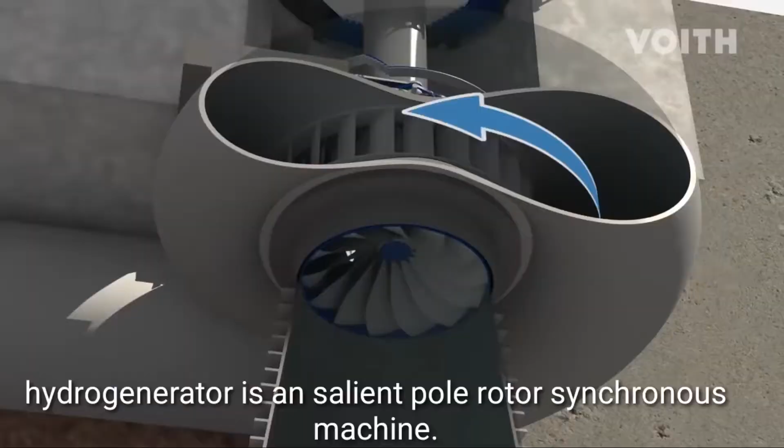The hydrogenerator is a salient pole rotor synchronous machine. The turbine rotates the rotor by the action of hydro energy from water flow. The turbine shaft is the same as the rotor shaft.

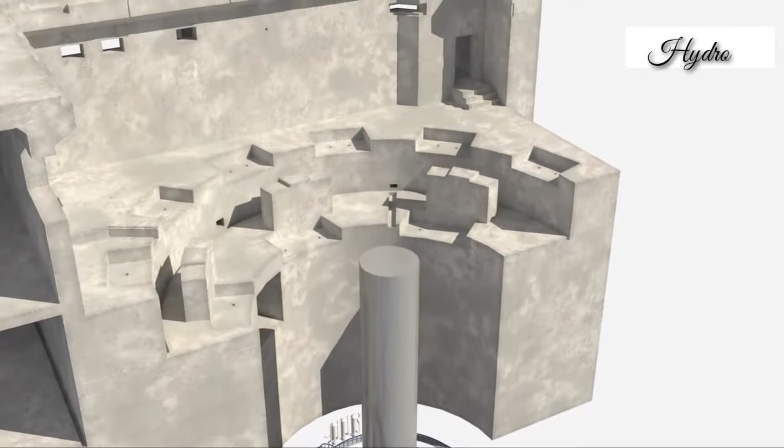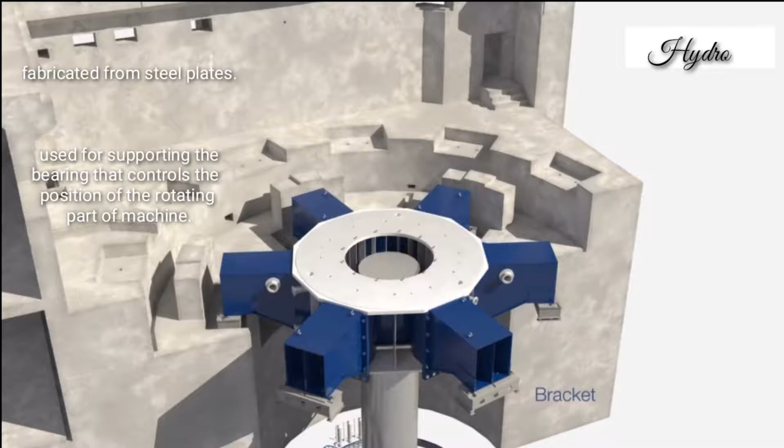This is the bearing bracket, fabricated from steel plates. It is used for supporting the bearing that controls the position of the rotating part of the machine, and it provides a foundation for brakes and lifting jacks.

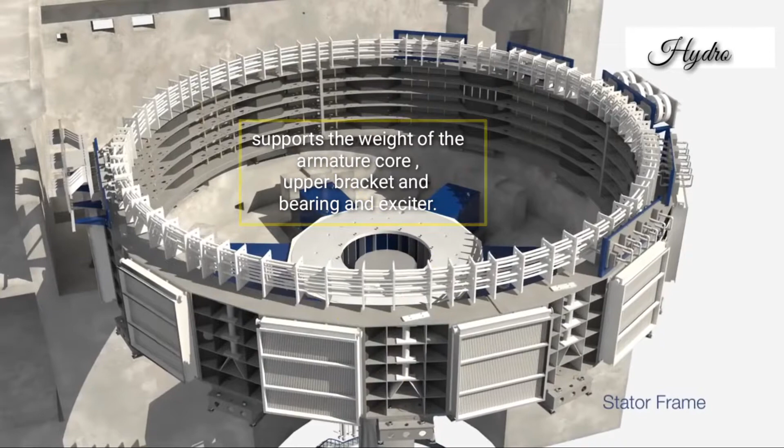The stator core is made up of cold-rolled grain-oriented silicon steel and carries the armature windings.

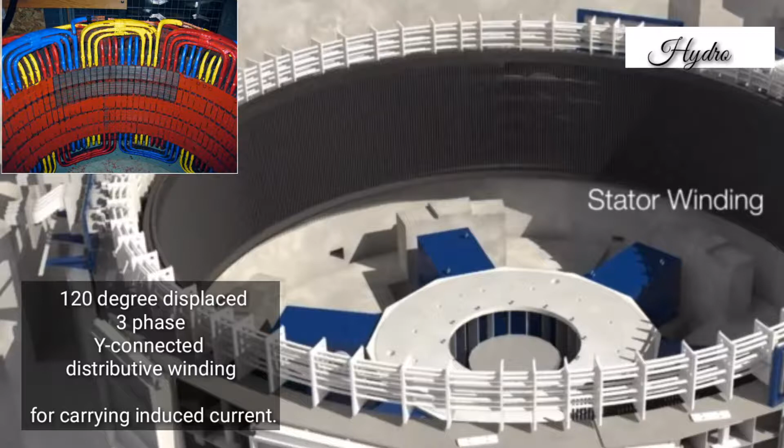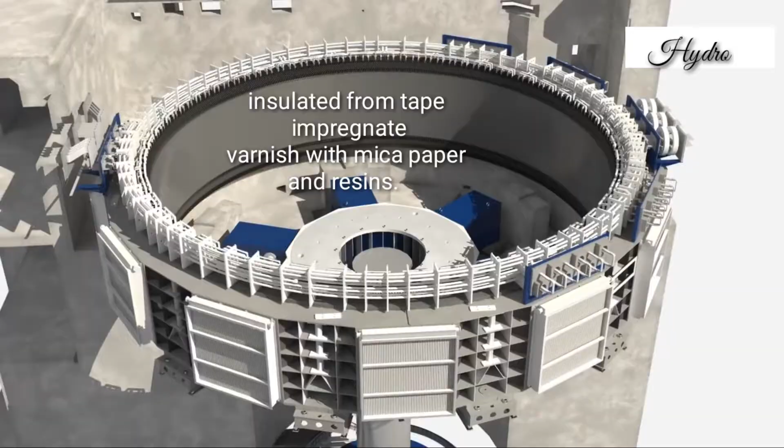The stator winding is a 120-degree displaced three-phase star-connected distributive winding for carrying induced current. It is insulated with tape impregnated varnish, mica paper, and resins.

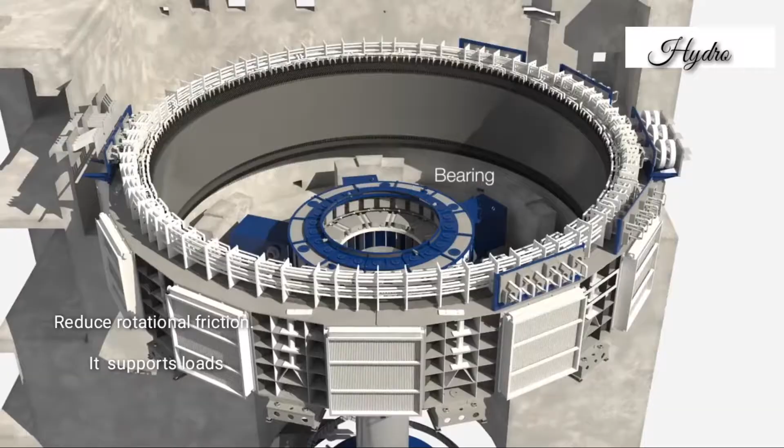The bearing is a thrust and guide bearing located below the rotor. It enables rotational movement of the shaft, reduces rotational friction, and supports loads.

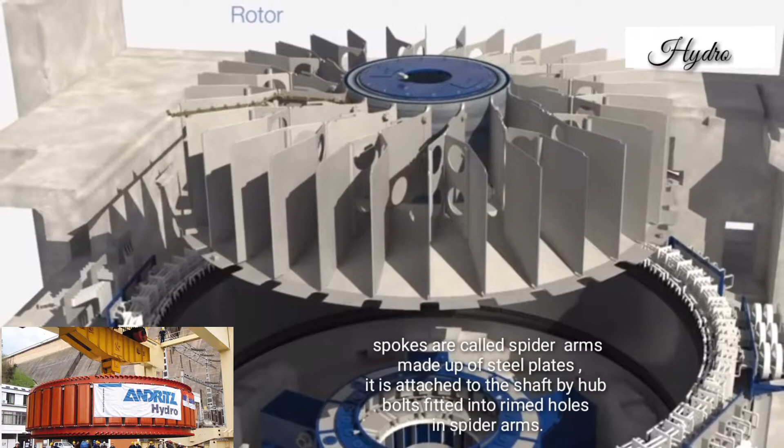The rotor is made up of several components including field poles, rim, spider, damper winding, salient poles, and field winding. These spokes are called spider arms, made up of steel plates.

The spider is attached to the shaft by a hub, with bolts fitted into rimmed holes in the spider arms.

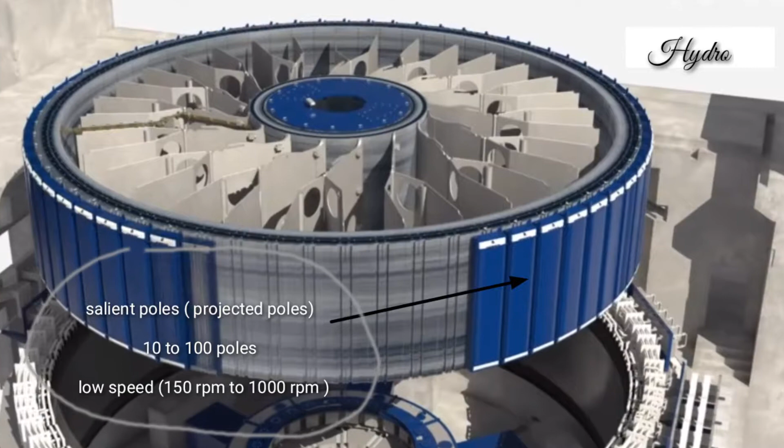These are salient poles, that is, projected poles, numbering from 10 to 100 depending upon requirement.

They run at low speed, from 150 revolutions per minute to 1000 revolutions per minute.

A concentrated field winding is provided on the pole face, having damper winding on the pole shoe to damp oscillation and ensure uniform flux distribution.

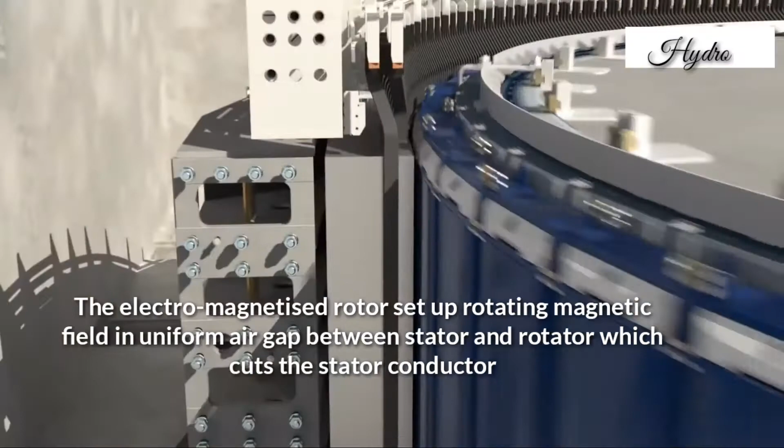The electromagnetized rotor sets up a rotating magnetic field in the uniform air gap between stator and rotor, which cuts the stator conductor.

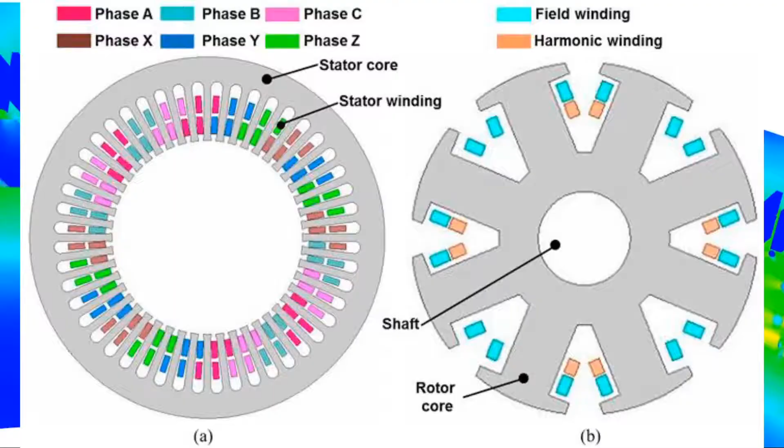Adjacent north-south pole pairs link with the three-phase winding and induce alternating voltage.

These are salient poles with concentrated windings, forming different north-south pole pairs.

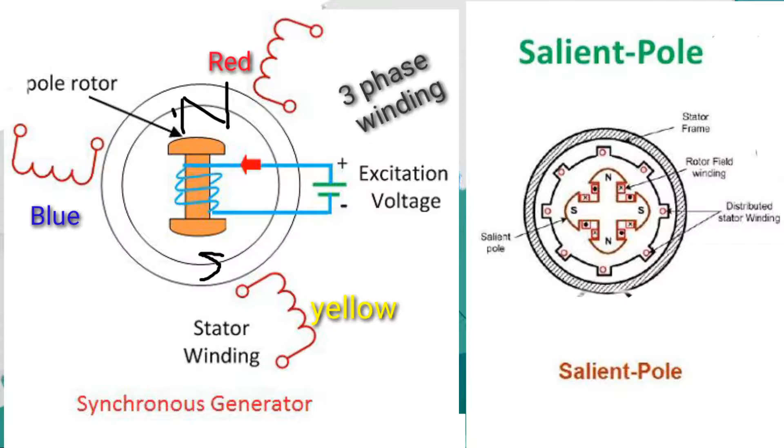The turbine blade and shaft connecting them to the generator are called the runner, which rotates the rotor.

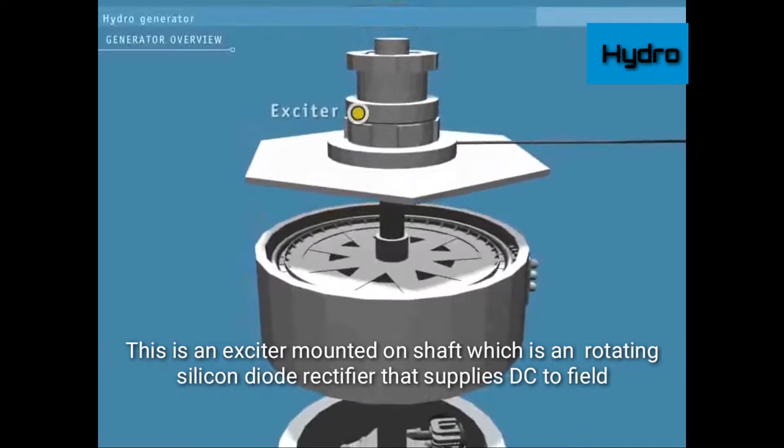This is an exciter mounted on the shaft, which is a rotating silicon diode rectifier that supplies DC to the field winding of the rotor.

This is done with the help of the AVR, which controls the AC voltage output from the stator.

The magnets are lined up so that adjacent poles always have opposite fields to each other: north, south, north, south.

These are rotor salient poles which get electromagnetized from external DC, and a rotating magnetic field is set up as the rotor runs by the action of the turbine.

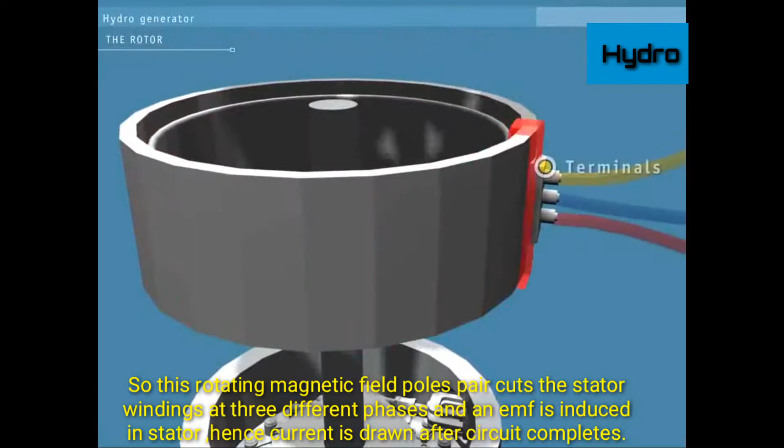This rotating magnetic field pole pair cuts the stator windings at three different phases and an EMF is induced in the stator, hence current is drawn once the circuit completes.

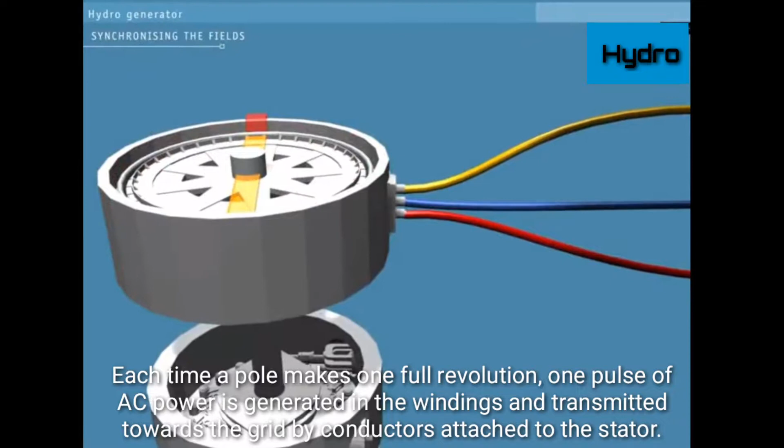Each time the pole makes one full revolution, one pulse of AC power is generated in the windings and transmitted.

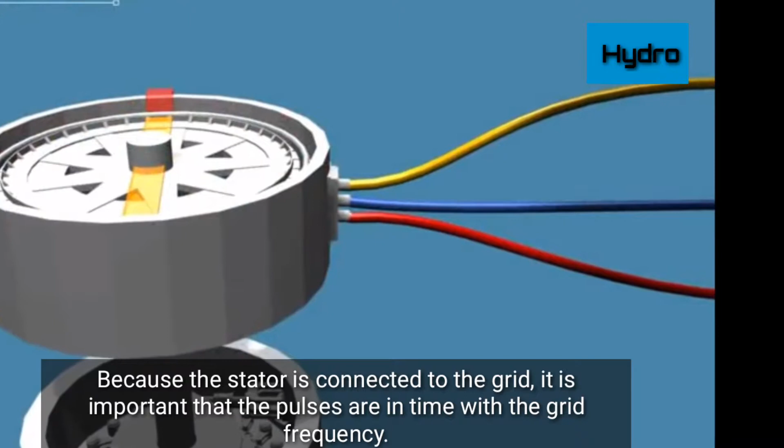This power is sent towards the grid by conductors attached to the stator, because the stator is connected to the grid.

It is important that the pulses are in time with the grid frequency. When the pulses are in time with the grid frequency, we say that the generator is synchronized.

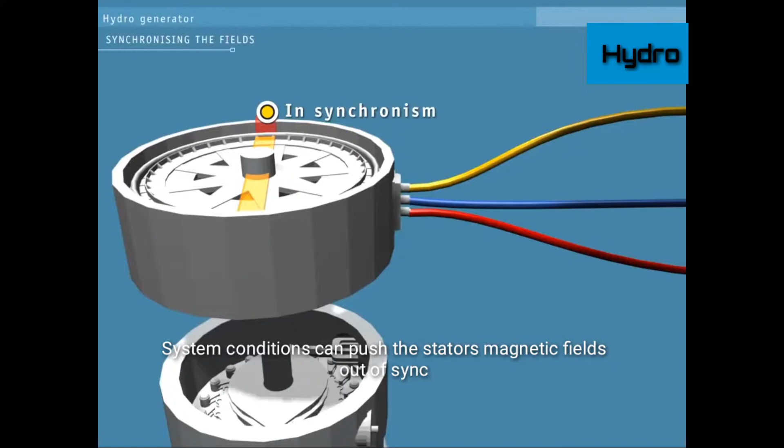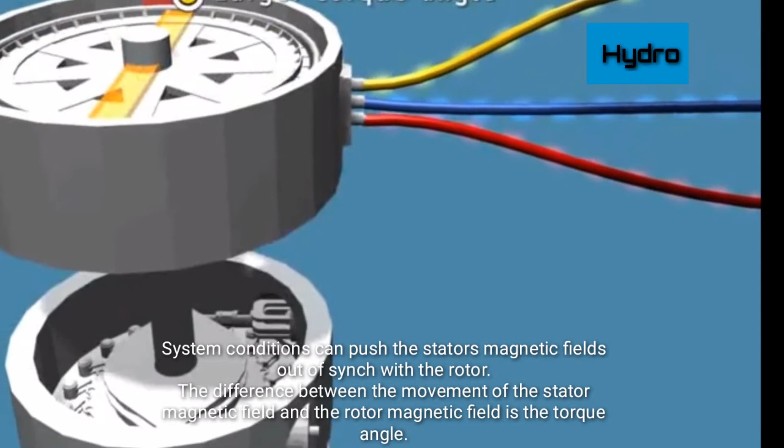System conditions can push the stator's magnetic field out of sync with the rotor. The difference between the movement of the stator magnetic field and the rotor magnetic field is called the torque angle.

The rotor has many electromagnets on it, producing a consistent flow of power.

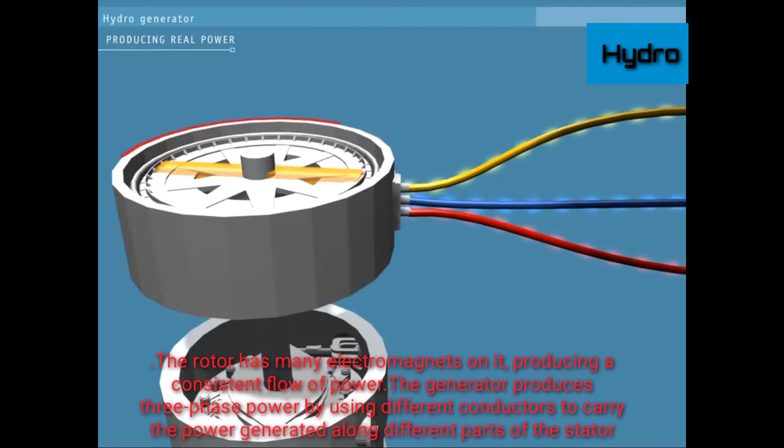The generator produces three-phase power by using different conductors to carry the power generated along different parts of the stator.

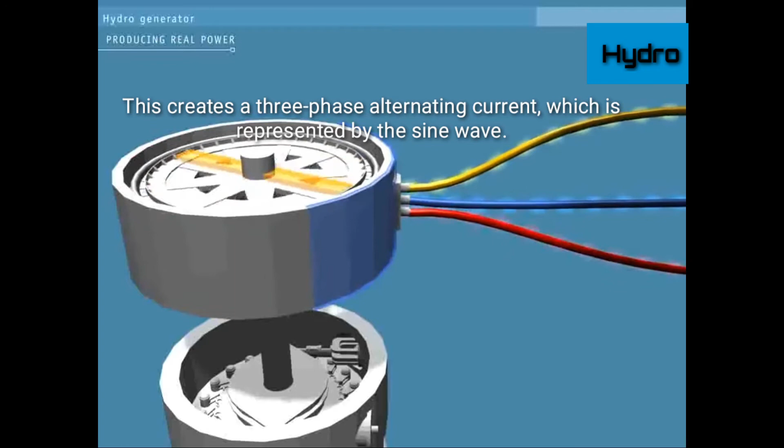As shown here, this creates a three-phase alternating current, which is represented by the sine wave.